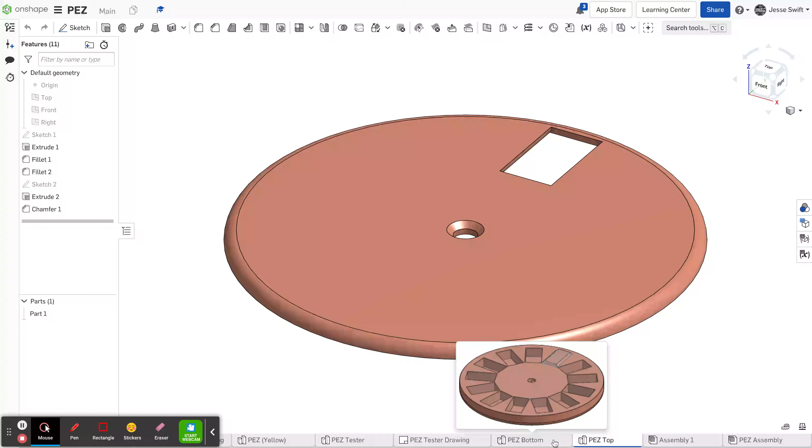Hey, this is Mr. Swift, and I just want to show you really quickly how to make technical drawings with Onshape for multiple parts.

So first thing we're going to do is click our plus button and go to create drawing, just like we have been in the past. And again, we're going to use the ISO A4 template. We'll click OK.

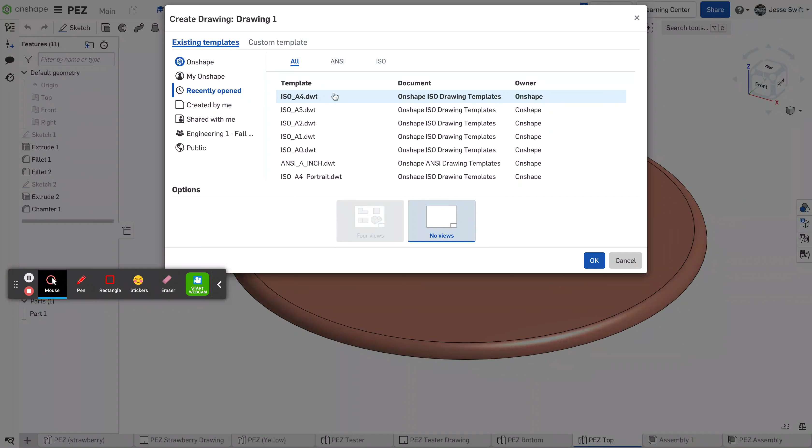Now, when we're doing these technical drawings for multiple parts, we don't need to get as detailed in our orientations of our drawings, or add as many dimensions, but we do need to start adding some pages to it. So I'm going to click here and bring my part 1 in, dragging that over.

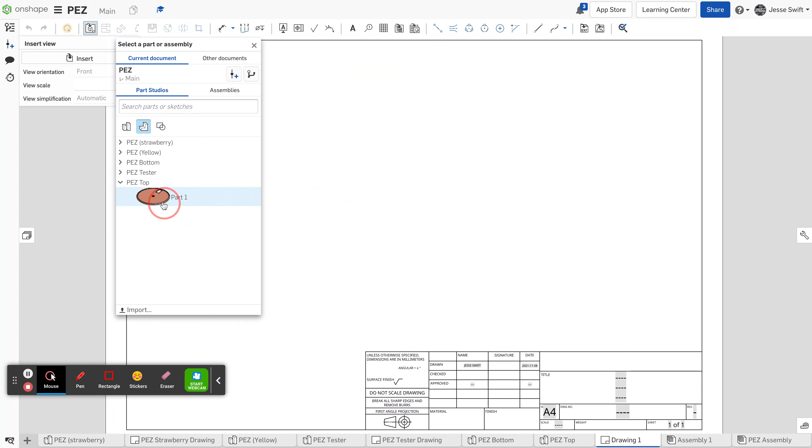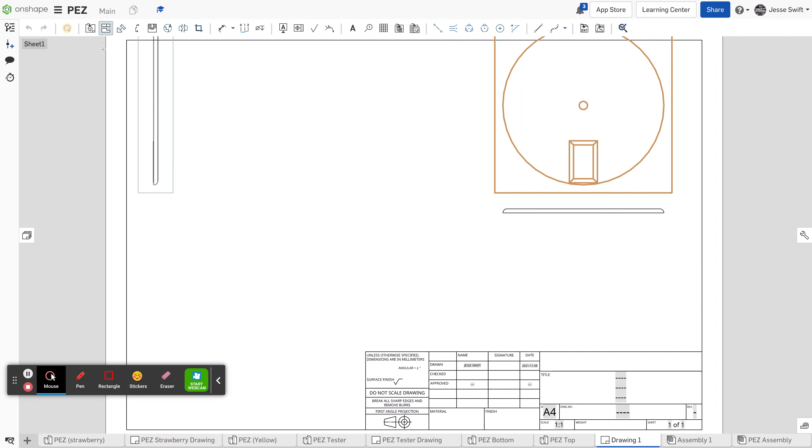I'm going to do the side view, which is really thin, and then I'll do a top view too, because this is just a simple shape. And then I'll do another side view. My part's a little different than your parts, but once that's done, I can click escape and bring this over.

What's really important on this aspect of your project is when you bring in the parts, you need to make sure your scale is 1:1. So I'm going to double click on this, and over here just double check my scale is 1:1.

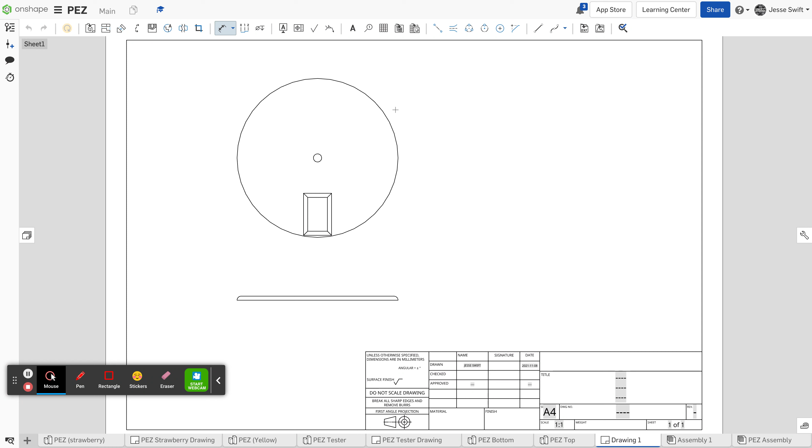Now I'm going to add a couple dimensions to this. I just want to make sure that all of these holes are correctly dimensioned. And then you should also do some hidden lines like we have in the past. But I'm going to do the thickness of this.

Now down here in our title block, we need to make sure that we add our name to it, just like we have in the past. We need to add our date like we have in the past. But one of the new things we're going to do is, let's see, today is the 11th.

The other thing we're going to do is add a note down here, and we're going to add the name of the part. So this is my Pez top.

All right, so this technical drawing is done, and this is the important thing that I want you all to see. Now that I have dimensioned some parts, I'm going to click over here.

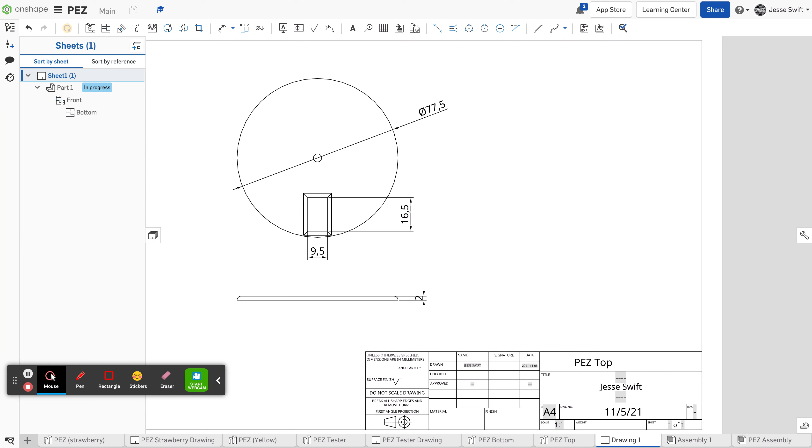I'm going to click on this little tray here, and it says sheets, and I'm going to make a new sheet. So I'll add the plus, and now this new sheet is going to be for one of the other parts.

So I'll click on insert, and I don't want the Pez top anymore. I want to insert something different. I want the Pez bottom. So I'm bringing that part over.

There's how thick it is, and then again I'll move up to show how tall it is, and you can bring whatever views you want in there.

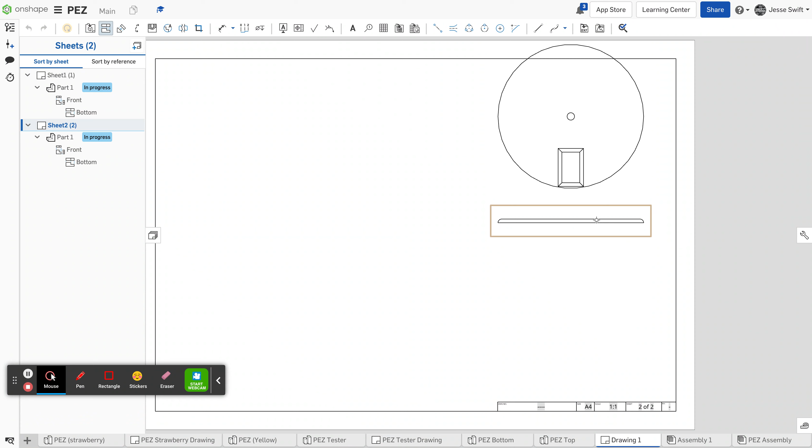But now I really want to make sure I have, double click it, double check your scale, and I do want to make sure that I have my hidden views shown on this one.

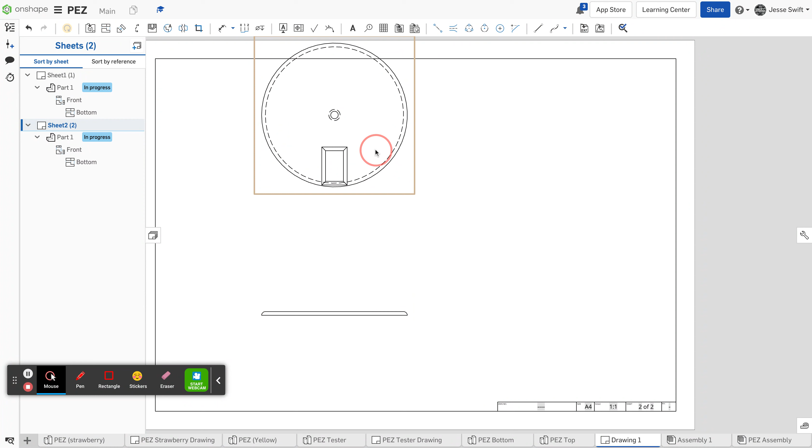All right, now that I got this done, again down here at the bottom, I'll add, this is my PEZ bottom. So we got to label these different sheets.

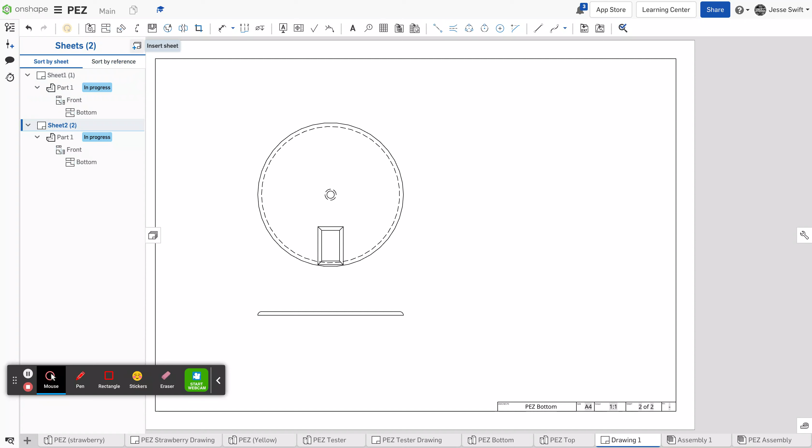Now, the last drawing I'm going to make, you might have more drawings or less depending on how many parts you have, but I'm going to insert a sheet. This time I want it to be the full assembly. So I'm going to click on insert, and you can click on assemblies and you'll see that it'll actually bring the assemblies over.

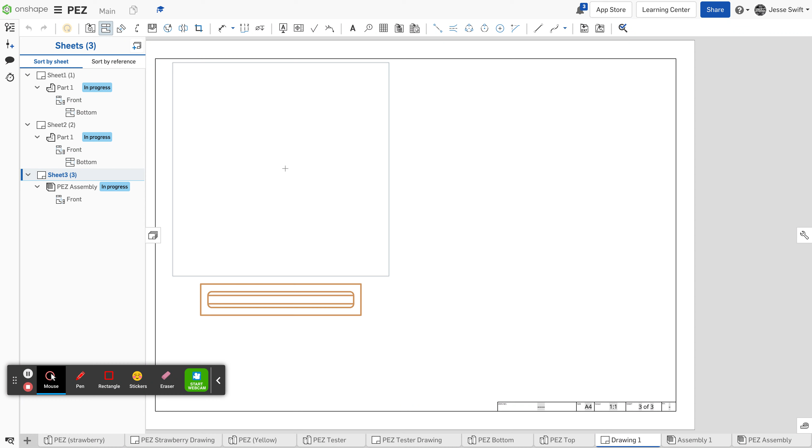So when we do the assembly, we want to make sure that we do all three views. We're going to have our front view, top view, side view, and then we'll also have our isometric view. And just like we did earlier, this should be the shaded isometric.

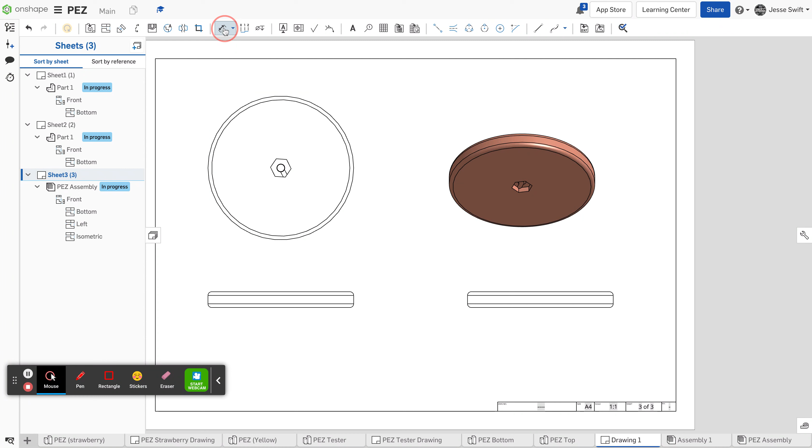So I'm going to right click, show shaded view. And then again, you need to get some dimensions in here. It's really important to have several dimensions so you know exactly what size your parts are going to be.

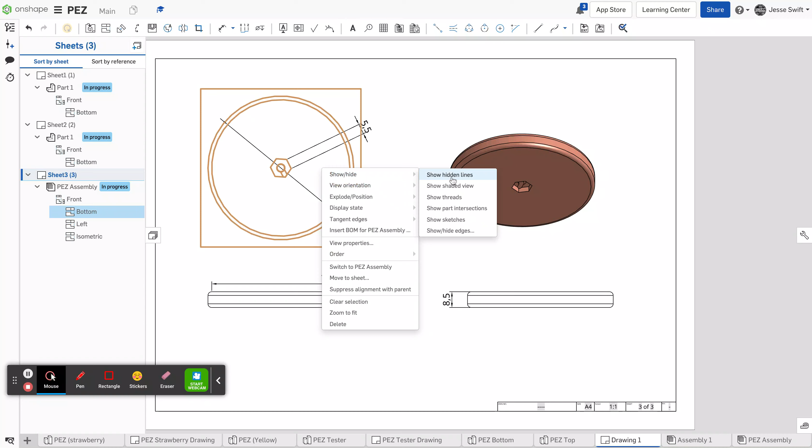All right, so again, I'm going to try to get how thick this is. And once you've got your shaded view, top view, side view, make sure you have any hidden lines that you need to be able to see. And then we also got to name our drawing.

So I'm going to double click down here at the bottom, and this is my PEZ assembly. So you got to make sure that you make a technical drawing for your assembly with dimensions and shaded and hidden lines.

Now, once you're done with that, you can go through and export this as a PDF. And when you export it as a PDF, you can print it to your computer, and print it off the computers in the classroom.